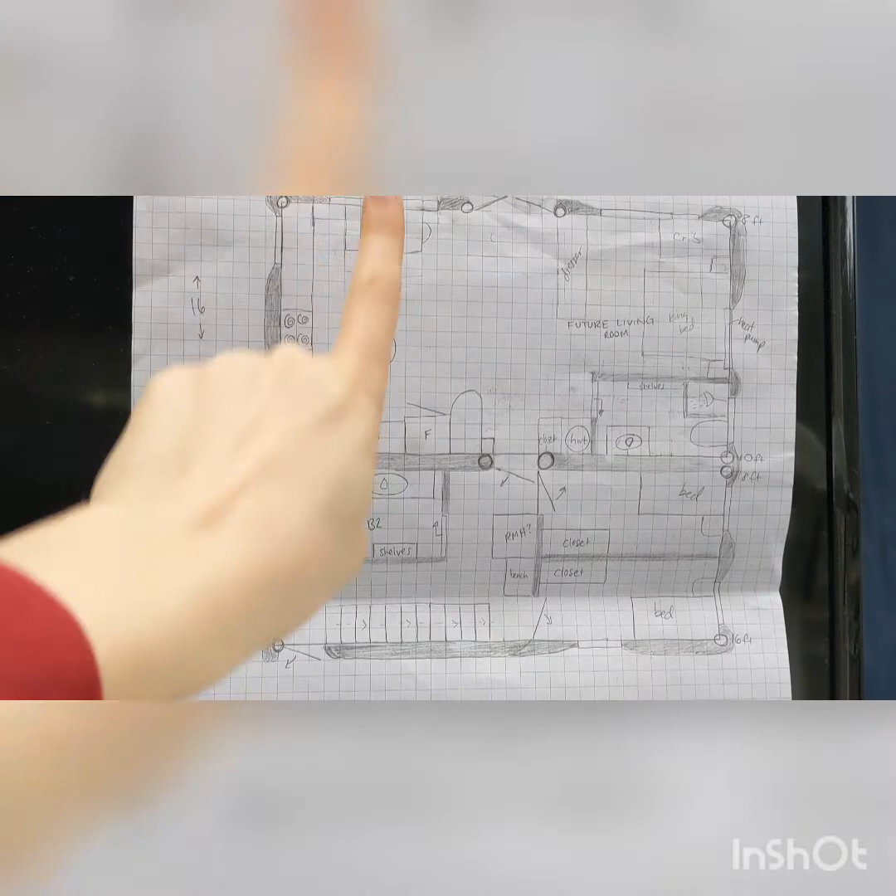A couple things to know about our lot in order to understand this design: our lot will likely have this green space here. This is the east, this is the south up this way, and then we've got west and the north. To the east, there will be a big green space for a future septic system. Up in front of the south here is some ponds, and it's a little ridge down to those ponds. There's one main pond that it looks over.

It's a pretty beautiful view, and it's also really lovely that that's where our south-facing spot is for more sun. So just to orient you, the idea is that this area here would be what our initial build is, and this area back here would be where we add on later. We're going to really just be looking here for the next little bit.

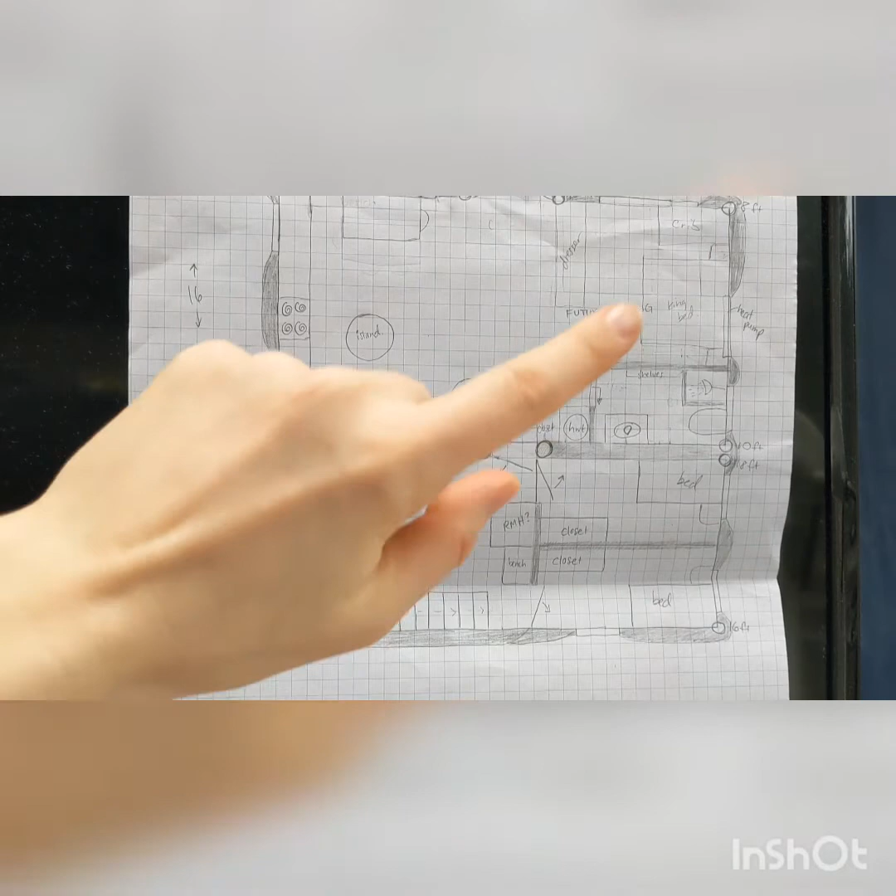So this would be where we could enter - a door from the outside coming in. We've got some counter space and fridge and some cupboards and sink and stove and oven, etc. Then our table here, our kitchen table. Hopefully some French doors or some kind of slider off the front.

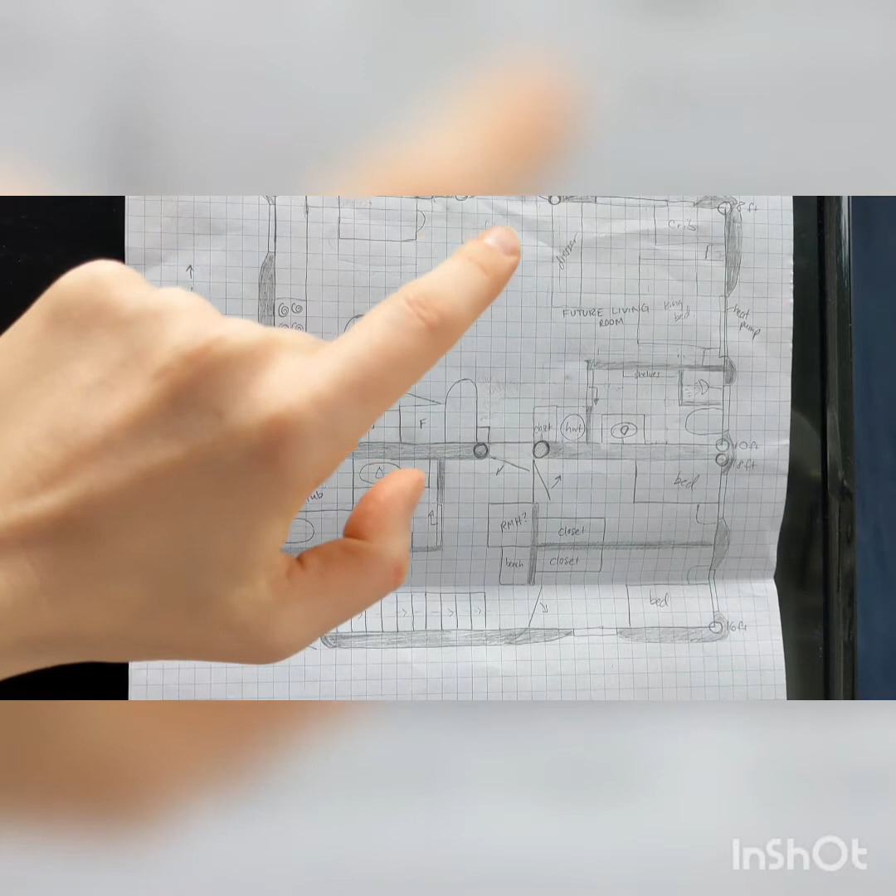This would be our future living room, but for the time being, this would be where we would have our king bed, our dresser, our crib for our little boy, etc. Then this would be a modest kind of bathroom space initially with a barn door that slides out, and we've got a shower and a toilet here.

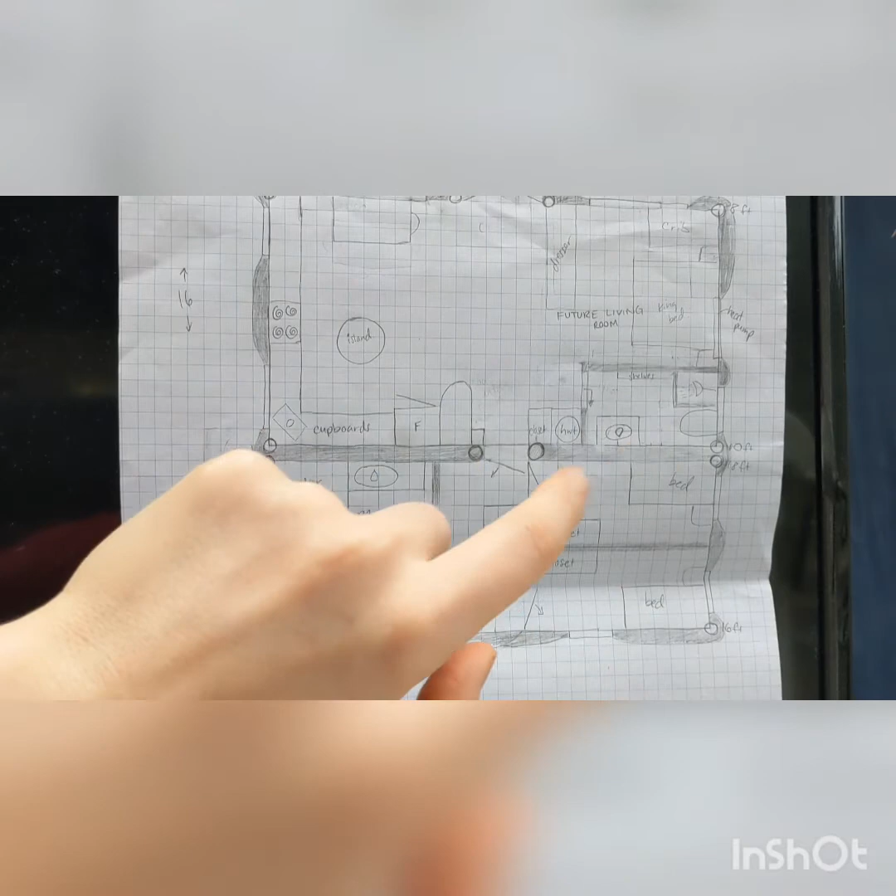We're looking at using an electric heat pump for our heat for this initial build. We're interested in potentially a rocket mass heater or something like that later on, but we thought, starting off with building is a big undertaking, especially a natural build, is a big undertaking for beginners like us. So we're going to keep things kind of simple to start off with.

The squares in this design are each a foot. So you can see that our exterior walls are a foot wide, and that's because we're planning to use a form of natural building called light straw or light clay. We're actually going to be using wood chips and clay for our walls, and we'll do that as an infill around our timber frame.

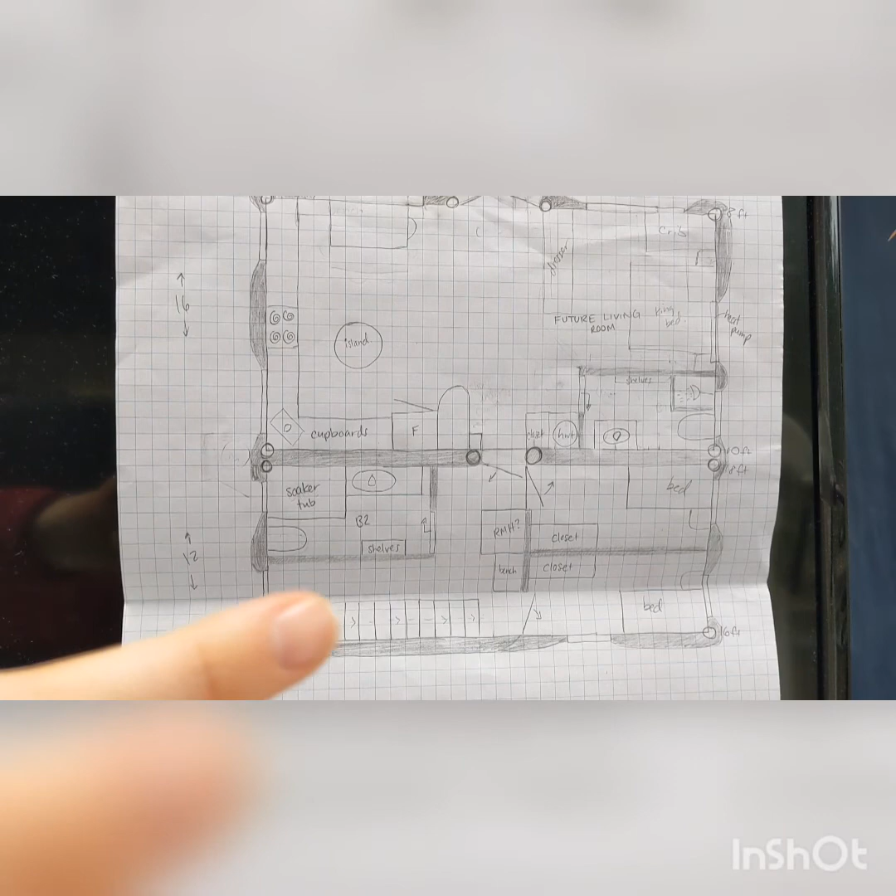The timber frame would have these posts here where the circles are - probably 8 feet to start with here and then 10 here, so that the slant is going down towards the ridge. That's so that we can allow for our addition to actually have a second story as well. That's why you see stairs down here in that second addition going up to an upstairs area that will have a roof slanted the other way so that the windows, essentially right along here on the second story, can all be south facing as well.

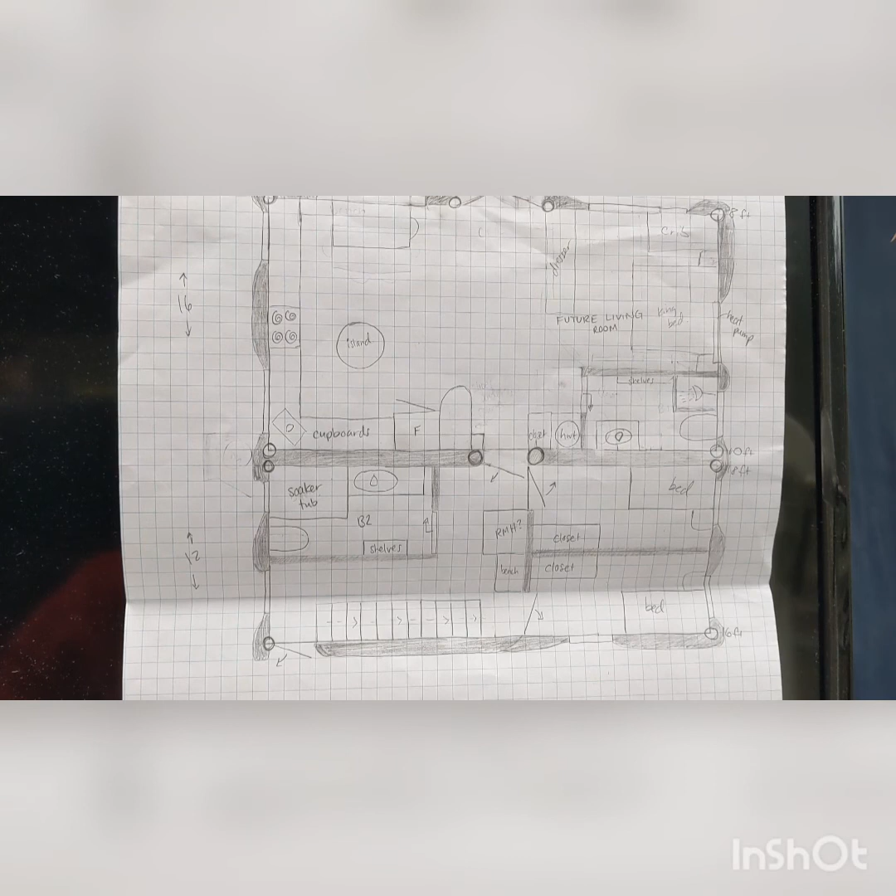I think that's everything to share. We've been consulting with a few people - one person who's designed a few natural homes and another person who's built a few, and we're getting some insights about the changes that have been important to make.

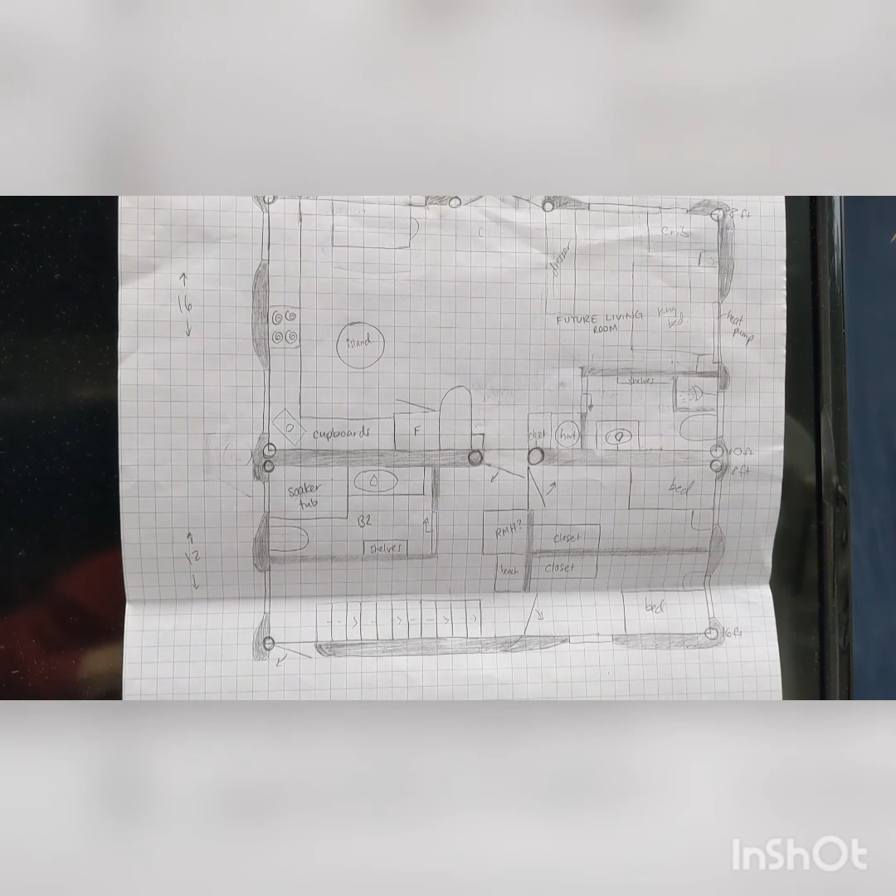We didn't start out at this design. We had a few other designs before we kind of started to refine and land on this one, and we know that things will likely change - probably things in this initial build, but definitely things in this addition that we're planning later on. But this is in the spirit of good enough for now and safe enough to try.